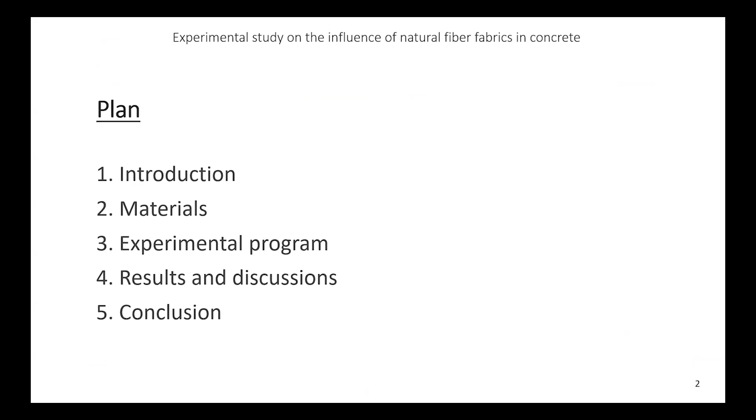So I will begin with the introduction. After, I will present the material used, the experimental program, some results, and finally a conclusion. This experimental research studied the effect of adding hemp fiber fabrics to concrete. In the beginning, we thought to put them directly in concrete, but then we decided to begin with the mortar, and so I will present the results in the mortar, to investigate the mechanical properties of the material.

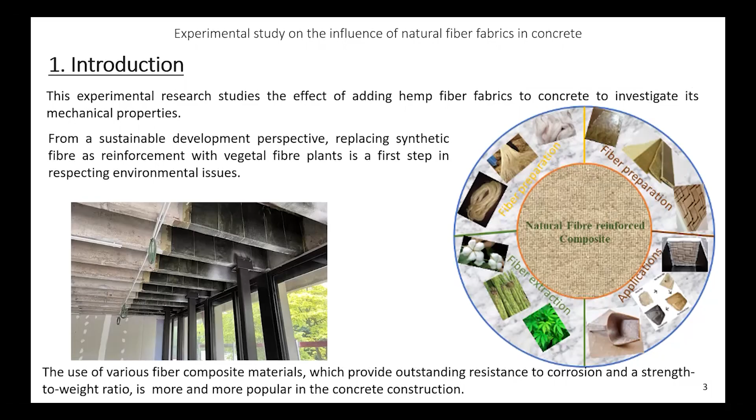We all know the strengthening of structures with carbon fiber or glass fiber materials, synthetic fibers, but the main idea here is to replace the synthetic fiber reinforcement with vegetal plant fiber, because this is a first step in respecting environmental issues. Many researchers use different fibers to improve properties, because fiber composite materials, which provide outstanding resistance to corrosion and a good strength-to-weight ratio, are more and more popular in concrete construction.

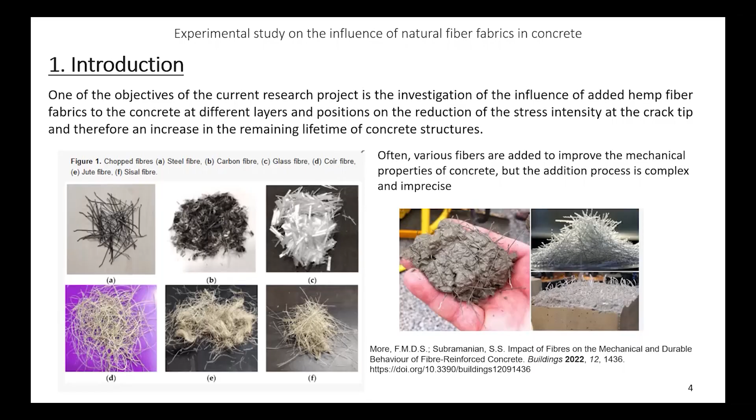Maybe you know that we talk about concrete reinforced by fiber. Many researchers use different fibers, like you can see here in the picture, steel, glass or carbon fiber, or also natural fiber. One of the objectives of the current research project is to investigate the influence of adding hemp fiber fabric directly, with different layers and different positions, to reduce the stress intensity at the crack tip and therefore increase the remaining lifetime of concrete structures.

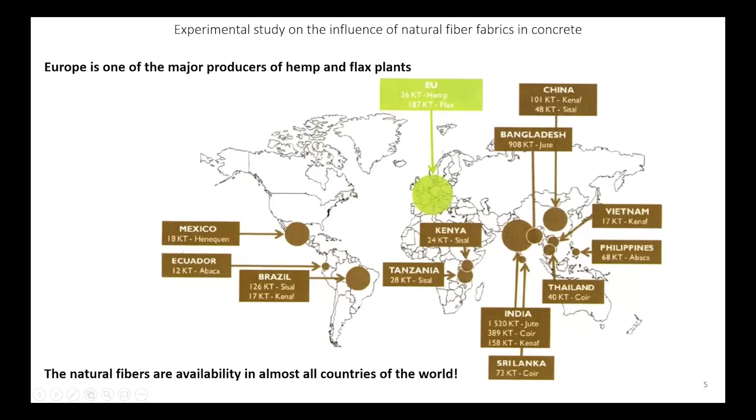So why did we choose hemp fiber? Because Europe is one of the major producers of hemp and flax fiber, and actually France is a big producer of hemp fiber, and hemp fiber is available in most countries of the world. Also, hemp fiber has many environmental benefits, great for environmental protection. The cultivation of hemp does not need fertilizers or pesticides. It is recyclable, and it has many applications in our life.

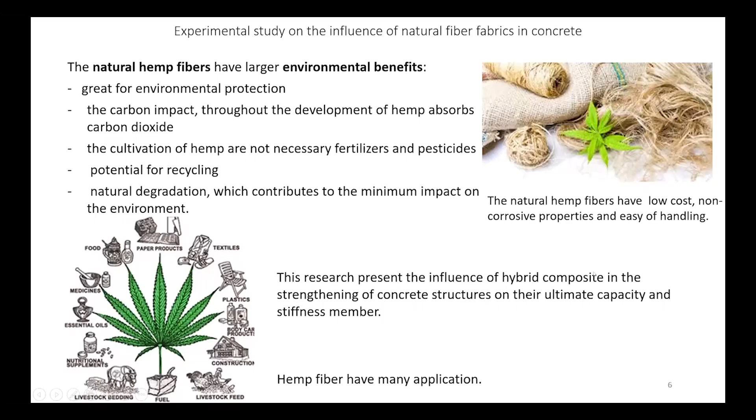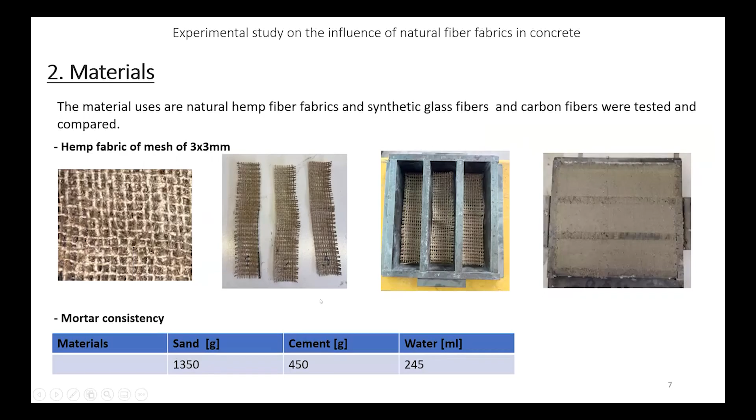So we use hemp fiber fabrics with a mesh of 3 millimeters. You can see it in the picture here. We prepare it and put it directly for some cases of our research, and after we put the mortar, consisting of sand, cement, and water. You can see the proportions here.

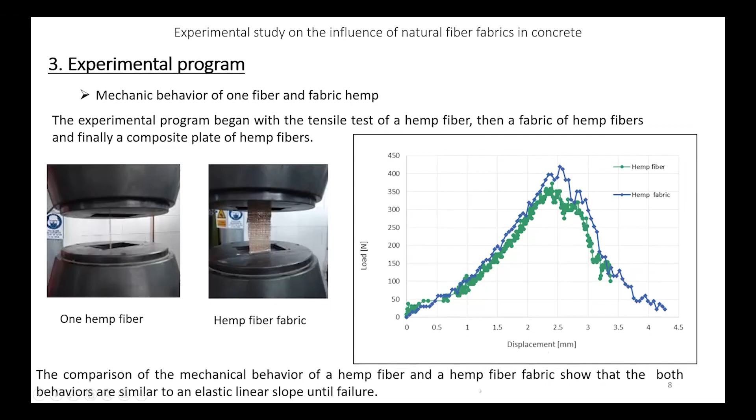And before this, we studied the mechanical properties of the hemp with tensile tests. You can see here some results for the tensile test of one hemp fiber and of the hemp fiber fabric, and the comparison of the mechanical behavior presented in the curve here. You can see that the hemp fiber and the fiber fabric both show similar behavior, an elastic linear slope until failure.

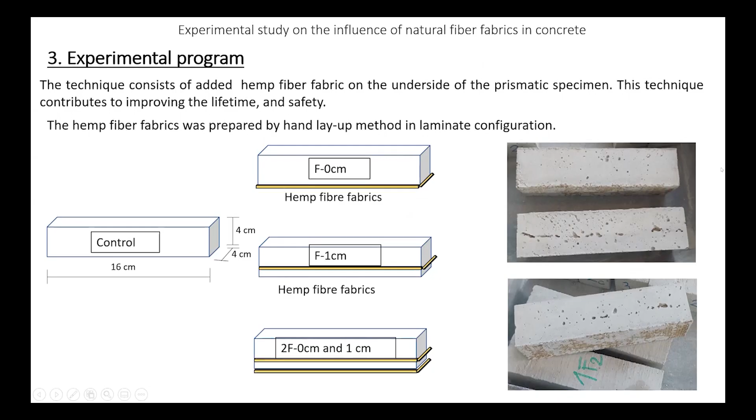The hemp fiber fabrics were prepared by the hand lay-up method in a laminate configuration, and then all specimens were tested in a 3-point bending test. During the test, the applied load and the maximum deflection are measured using sensors and recorded by a data acquisition system. All specimens were tested in the same direction as they were made, because the fabric must remain on the underside of the specimen. And we tried to make the surface smooth for a better test.

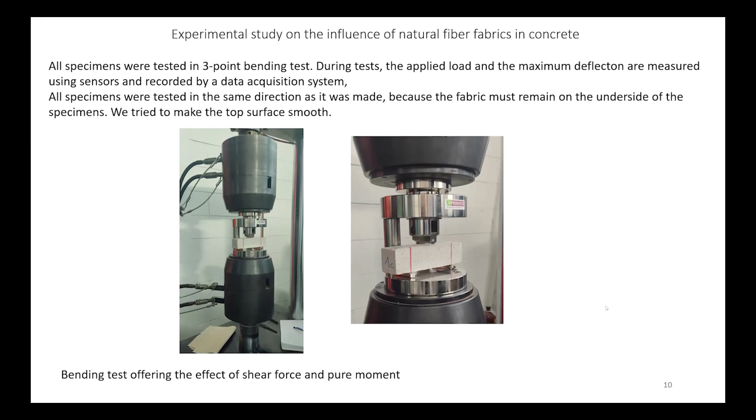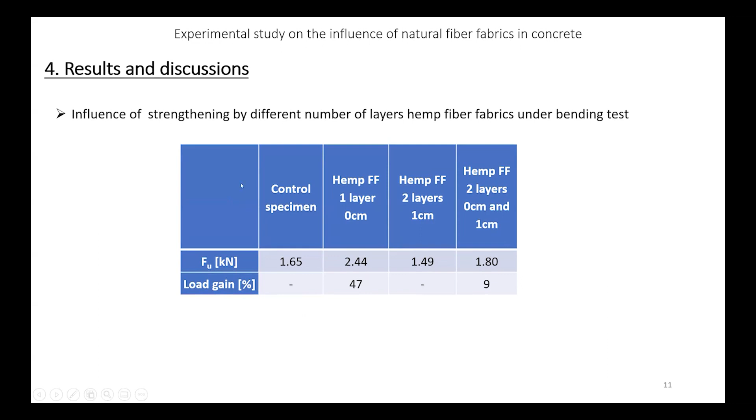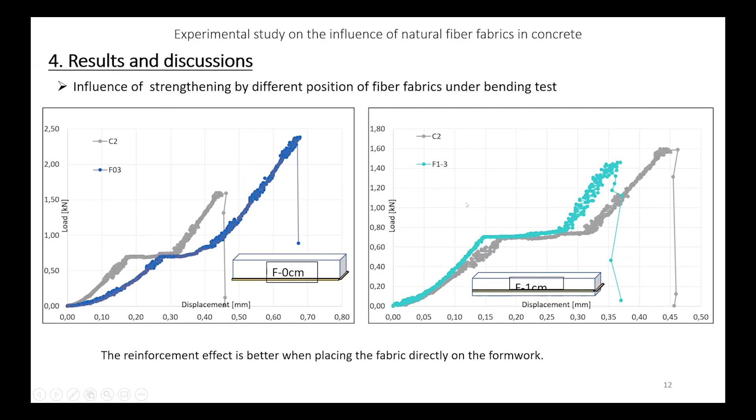And in a comparison of different numbers of layers, with the green curve, you can see the third case with two layers at 0 and 1 centimeter in the specimen. We have the same behavior as the specimen strengthened with one layer at 0 centimeter put directly. The first case with one layer at zero stayed the better solution.

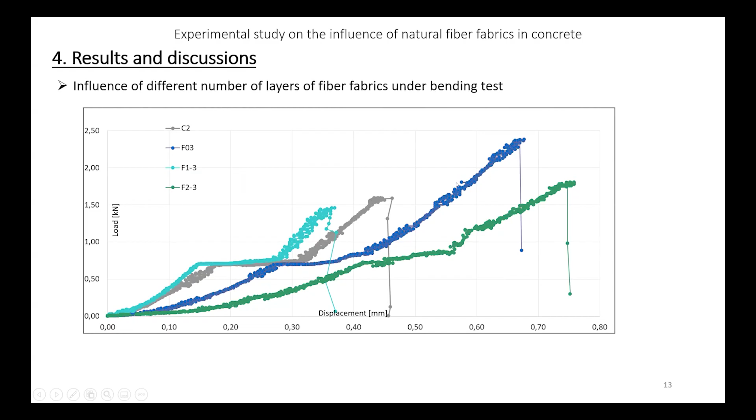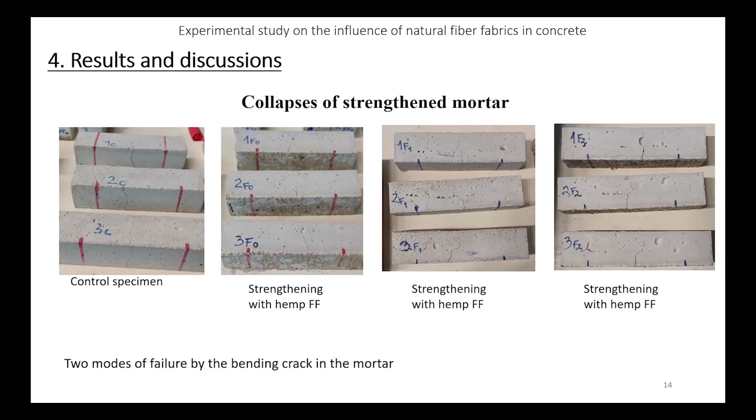So in conclusion, with this study, layers of natural fiber have been investigated to better understand their mechanical properties. This experimental research approach provides a better understanding of the mechanical behavior and sliding between fiber and mortar, and the effect of different layers. The work showed an increased ultimate load of 47% in flexural strength compared to the control specimen without strengthening, and it is not to be ignored. For this, we will continue this study.